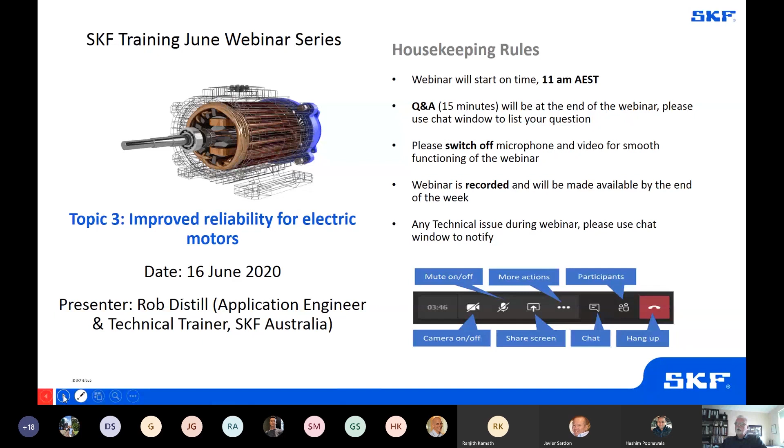I think most of what we'll cover here will be perhaps consideration of different things that happen in the field and also during rebuilding or repairing.

Typically, electric motors you'll find everywhere. In your house, you'll find them. Just about everything that has any type of mechanical movement will be actuated by some sort of an electric motor. It could be in your washing machine, or in the fan in your air conditioner, for example, your power drills, cordless drills.

In industry, though, we also find many motors, much larger than what you find in the home, of course. They'll be in conveyor drives, pumps, crushers, just about anything that rotates. And as such, there would be more electric motors than any other machine type in the world.

So if an electric motor fails or stops, then the machine itself will also stop. And of course, that can cause many issues with downtime, for example.

Perhaps a motor driving a pump, which is similar to what we have in the bottom left-hand corner here. If one of those pumps stops, perhaps it's not too much of a major drama. But there's still costs involved, of course, but as far as production losses go, they might be minimal.

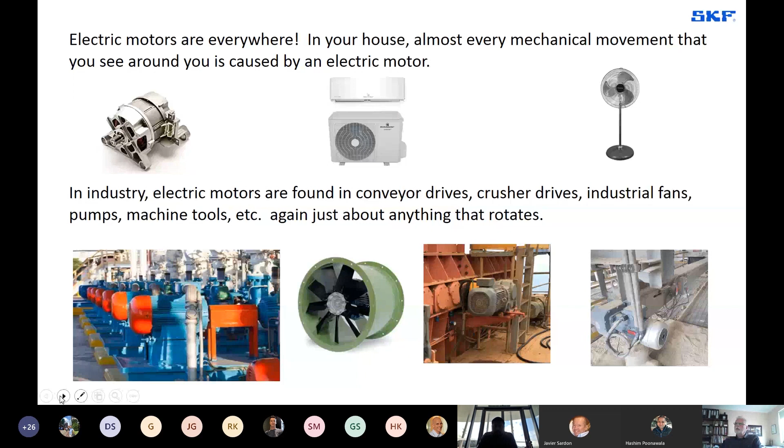Broadly speaking, electric motors can be separated into two different categories. You've got your general purpose motors, which have standard dimensions and characteristics. They're basically, you can find these in a catalogue. Many manufacturers make interchangeable motors. Then we have our special purpose or special design motors, which are for specific applications.

So, for example, it could be traction motors for locos. It could be specific motors that are integrated into electric cars these days, for example. So they're specifically designed for an application, not general purpose.

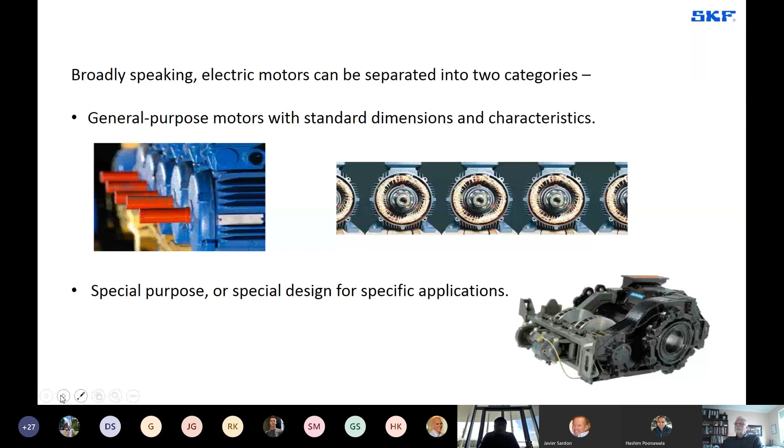So in general, though, medium and large companies, 60 to 65% of those motors are under 10 kilowatts. So they're only fairly small ones. But on average, 43% of electric motors are repaired, and the remaining 57% are replaced by new motors.

Motors lower than 10 kilowatts are usually replaced. These days, though, even much larger motors are just being replaced. They're not being repaired. Anything up to, say, 45, 50 kilowatts are commonly replaced these days. So we're living in a more and more a throwaway society.

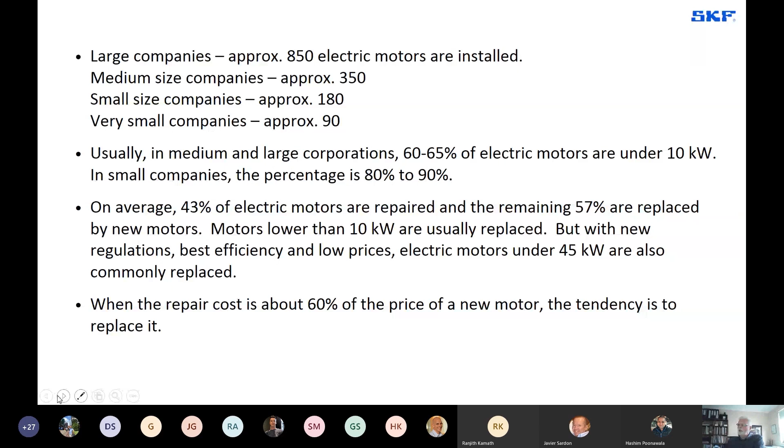When the repair cost is roughly 60% the price of a new motor, the tendency is to replace it.

As Hashim said, 40 to 70% of motor failures are generally related to the bearings, and electric motors account for many stoppages, many reliability incident reports.

General maintenance of a motor, and we're talking about just changing bearings, re-greasing, seals, for example. Not talking about electrical reworking, but it may be around 5 to 10% of the purchase cost of a new motor. So relatively cheap just to replace the bearings.

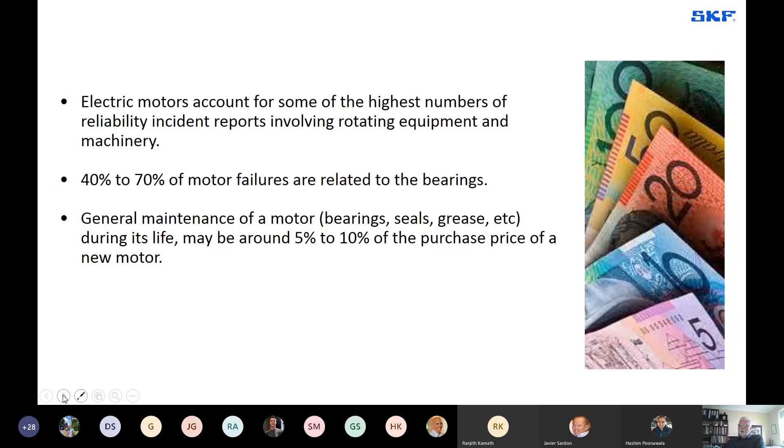However, we still need to have good reliability. So assuming quality bearings are used, how they're installed, how they're handled, lubricated, how the motor's aligned, that has a huge impact on motor reliability.

How the motor's installed, how it's also lubricated. So firstly, we have to lubricate correctly from a repair point of view, or the OEM has to lubricate correctly. But then when it's in the field, it has to be also continually lubricated, in the correct way, using the correct grease. How it's aligned, how it's maintained - these are all critical to the motor's performance and longevity.

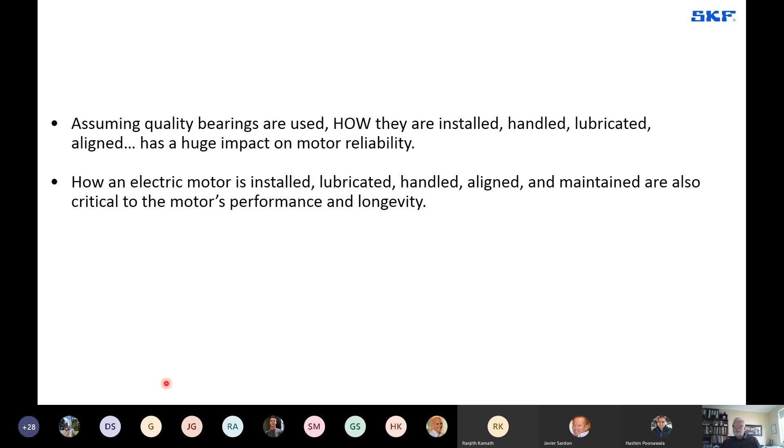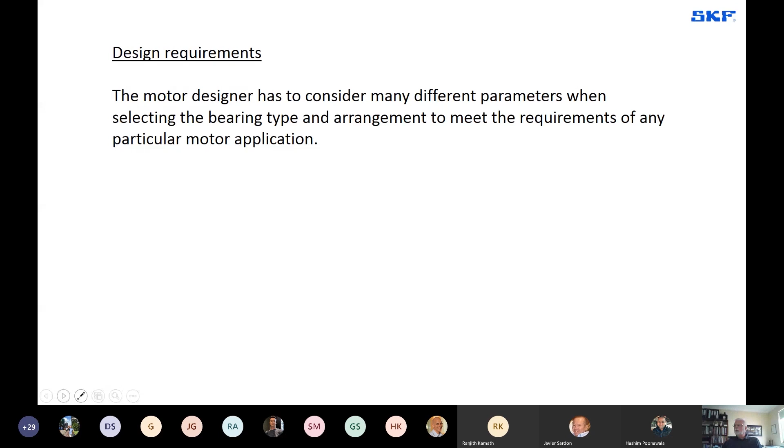Let's look at the design requirements. What does a motor designer have to consider when selecting a bearing type, and what type of arrangement? What does a designer have to consider?

Firstly, dimensions. The dimensions of the bearings are generally determined by the shaft size, and the shaft size is generally determined by the power output of the motor. So that's the starting point.

Now, to determine the shaft size, the designer has to understand what sort of loads are being applied, so all operational loads have to be taken into consideration. If the motor is being directly coupled, for example, the radial loads acting on the shaft and on the bearings won't be as high as if the motor is being fitted with a 6-groove pulley, with belt loads on it.

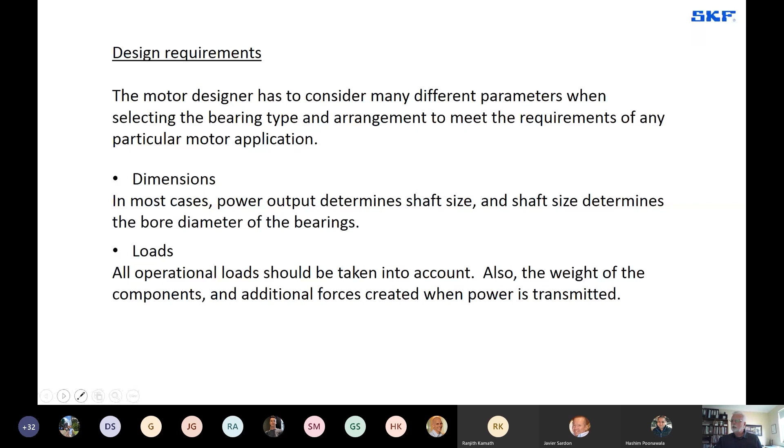So the designer has to take into consideration where that motor is going to be used. He has to understand what these loads are, has to consider the weight of any additional components, the weight of the rotor itself, plus the pulley, plus the coupling, etc. He has to know whether the motor is going to be used vertically, so there's going to be an axial load, for example. Also, there'll be additional forces created when the power is being transmitted.

Speed is important. It influences the bearing and lubrication life. The higher the speed, generally the higher the temperature will be. When the operating temperature is higher, we have to consider different types of lubrication, both in type and quantity, and relubrication intervals based on the operating temperature.

The clearance of the bearing has to be selected correctly. Maybe the seal type, and the cage design of the bearing can be affected by the speed of the motor or bearing. Normally, ball bearings are more suited for high-speed applications than roller bearings.

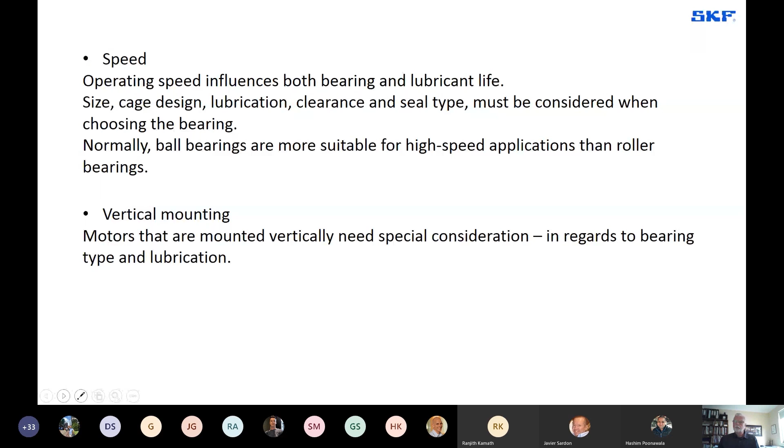Vertical mounting - the bearings are going to be mounted vertically, so perhaps there has to be a specific bearing type which can take those axial loads. Also, lubrication comes into it again - how often it's lubricated, for example, what type of grease is used.

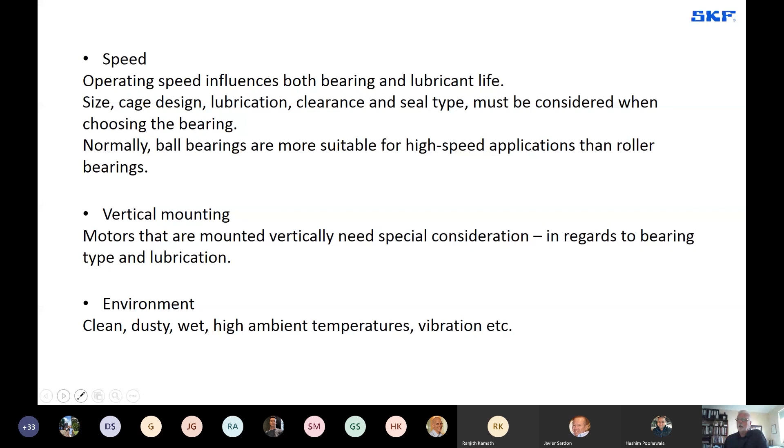Environment - if it's a clean environment, happy days. If it's a dirty environment, a wet environment, a dusty environment, certain seal types are required, and relubrication might have to take place more often to compensate for any contamination that might get into the bearings.

So let's have a look at typical designs. We have to consider a few things in a motor, like shaft expansion due to internal temperatures. If we have a motor operating where the internal temperatures are 80 degrees, for example, and an ambient temperature of 30 degrees outside, there's going to be some thermal expansion of the shaft.

We'll normally have a locating bearing on the left-hand side here. The locating bearing is held and locked onto the shaft - the inner ring's a tight fit on the shaft, and the outer ring sits in the housing and would normally be axially clamped. So the cover is clamped up against the side face of the outer ring of the bearing, which holds it up against the internal cover.

The non-locating bearing has to be able to move axially in both directions to allow for shaft expansion and contraction if shut down. There are different types of arrangements we'll talk about later, but this is showing a deep groove ball bearing at this end, and you'll see there's a wave washer sitting here. This wave washer is allowed to compress - it keeps a small axial preload on the bearing, but as the shaft expands, the wave washer can compress, which allows the bearing to float in the housing.

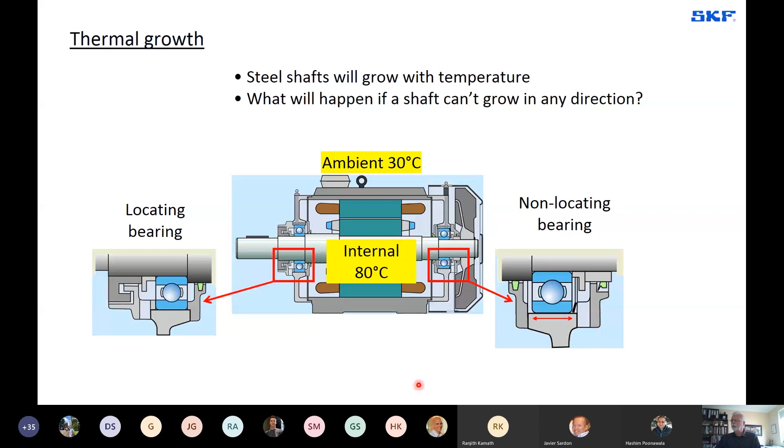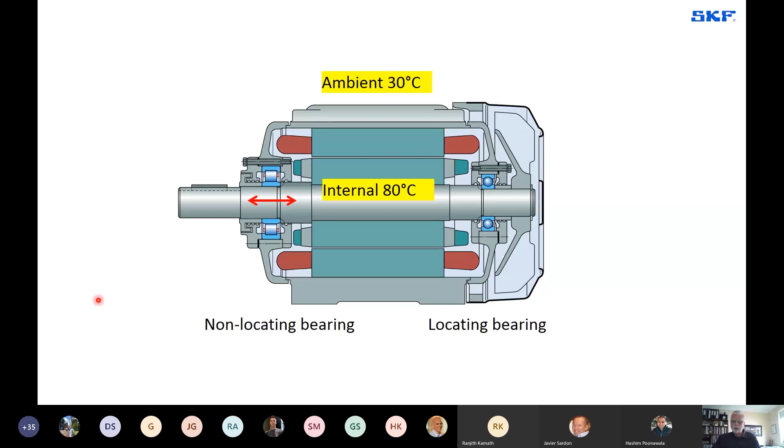Okay, so small motors typically have two deep groove ball bearings. They're typically sealed or shielded with a factory grease fill. They're generally considered to be low maintenance because no relubrication is required. The bearings are designed or selected, and the grease inside the bearing is selected, so that the bearing will give long life under normal electric motor conditions.

So we could be talking 4, 5, 6, 7, 8 years or more. The bearing life is determined essentially by the grease life. Over a period of time, the grease will gradually lose its good lubricating properties, and we'll end up getting a bearing failure at some time. But providing the OEM has selected the bearing and the grease type correctly, and the motor is used the way it's intended to be used, then the bearing should see a very long life.

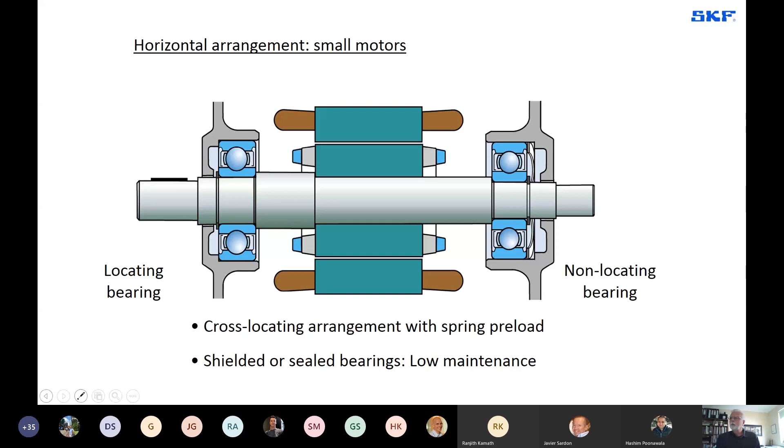Looking now at medium-sized motors. Medium-sized motors typically would still be two open ball bearings. This time they're set up in such a way that they can be relubricated on a regular basis.

In some cases, we have what's called a grease escape valve, which is a rotating disc internally, sits here, and this rotating disc rotates. The grease comes in through to the back of the bearing. The rotating grease disc picks up the excess grease and throws it outwards out the discharge slot.

Technically, these bearings can't be over-greased, providing there's no blockages in the discharge slot. So these bearings, again, depending on the temperatures and speeds, etc., will have to be re-lubricated on a regular interval.

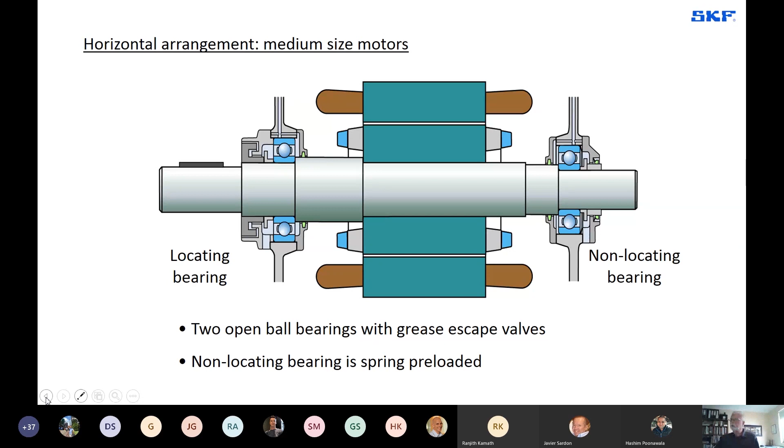Moving now up to large motors. In this case, we generally have heavy loads on the drive side, typically from a V-belt drive, for example. Usually, you'll find the drive side bearing is the non-locating bearing, and it will also be a cylindrical roller bearing.

Again, these motors are usually installed with grease valves, or at least some way to let excess grease come out, because they will be required to be re-lubricated on a regular basis.

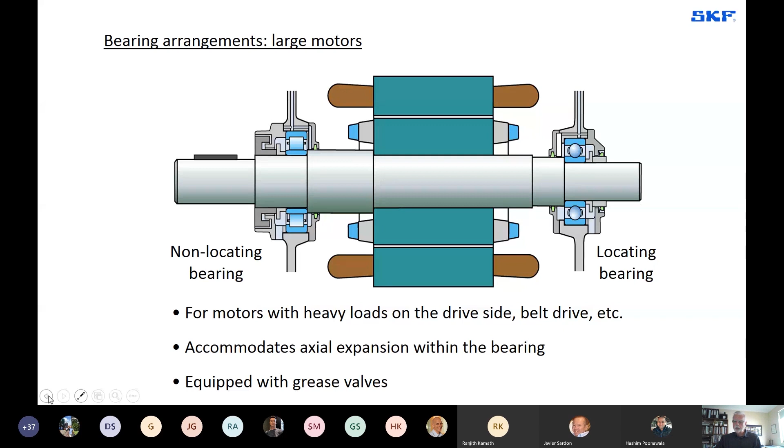We get up to really large motors with very heavy rotors. It might be necessary to have a cylindrical roller bearing at each end. Now, these bearings can't take axial loading, so therefore it's necessary to have a deep groove ball bearing, or perhaps a 4-point angular contact ball bearing, to locate the rotor and take any axial loads.

Again, these bearings, because of their size, need to be re-lubricated on a regular intervals.

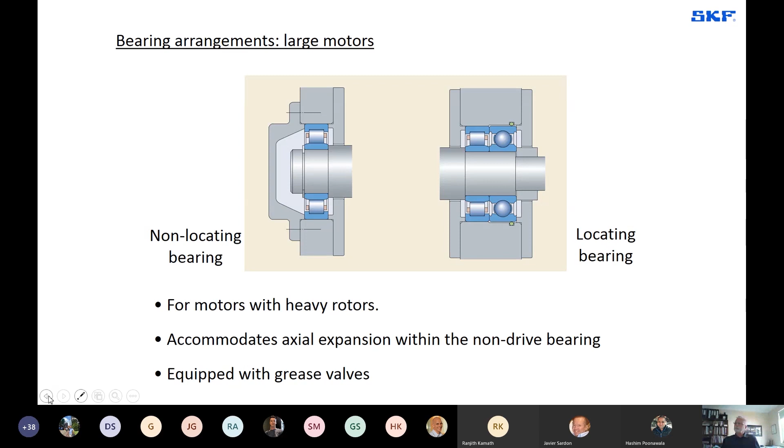Finally, vertical electric motors. Vertical electric motors, especially larger ones, may have angular contact ball bearings, for example, to carry the axial loading. With a vertical shaft arrangement, quite often the radial loads will be minimal unless the motor is connected to a driving something with a V-belt drive.

It's really important with angular contact bearings that they are orientated the correct way. If they're a back-to-back or a face-to-face design, it's important that the bearings during maintenance go back in the same way. They can't be altered. So angular contact bearings, if fitted the wrong way around, will fail very quickly.

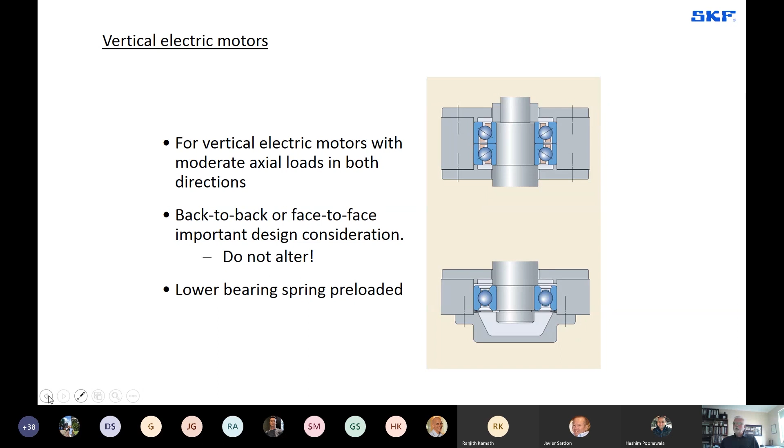Okay, so what is causing bearing failures in electric motors? A study done back in 1990 shows that lubrication was the main issue relating to poor reliability, followed by contamination, alignment, installation, overload, and the environment.

And sometimes it can be a combination. Quite often it's perhaps a combination of all these things which cause bearing failures.

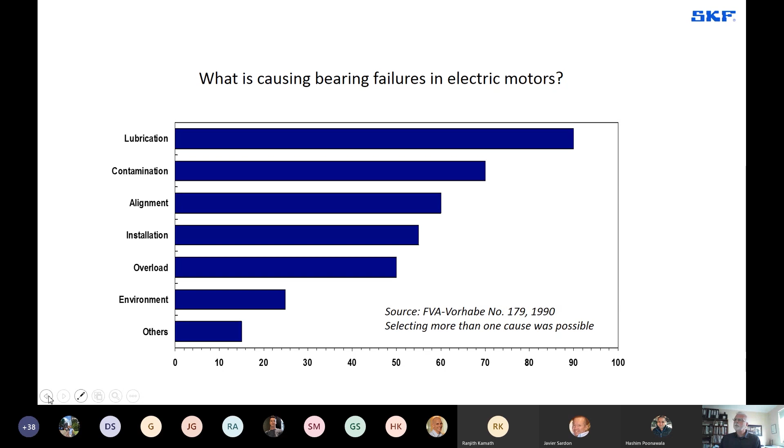So if we look at it from what I'd call an in-operation factor, we've got operational factors such as perhaps overloading, basic care, lubrication, unbalance, for example, can all cause issues.

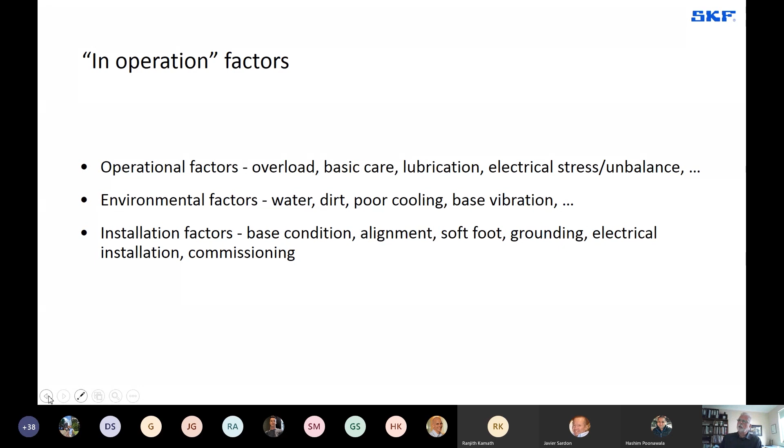Environmental factors such as water, dirt, poor cooling, vibration. Installation factors where we're looking at poor base condition, poor alignment, soft foot, grounding, electrical installation, commissioning. All of these things are classed as in-operation factors.

So let's look at lubrication to start off with. How much grease do we put in? I'm not going to talk about oil lubrication here. I think the majority of motors are lubricated by grease. So if we just consider grease at this stage, how much grease do we use? How often should it be put in? What type of grease?

Obviously, something like this is indicating insufficient grease. We've got a massive cage failure. We've got a bearing which has failed catastrophically. When we look over here, we can see too much grease. Grease has gotten in, it's filled up the back of the motor, completely filled the windings up.

So how much to start off with? Typically, electric motor manufacturers will generally specify how much grease, what type of grease and how often. If that information's not available, the SKF rolling bearings catalogue, pages 110 to 127, has a really good chapter there on lubrication.

It talks about selecting the correct viscosity, the correct consistencies, how to determine how much and how often. How much is determined by the size of the bearing, how often is determined by speeds, temperatures, environmental conditions, etc. The other thing that can be used is a program that SKF have put together called DialSet.

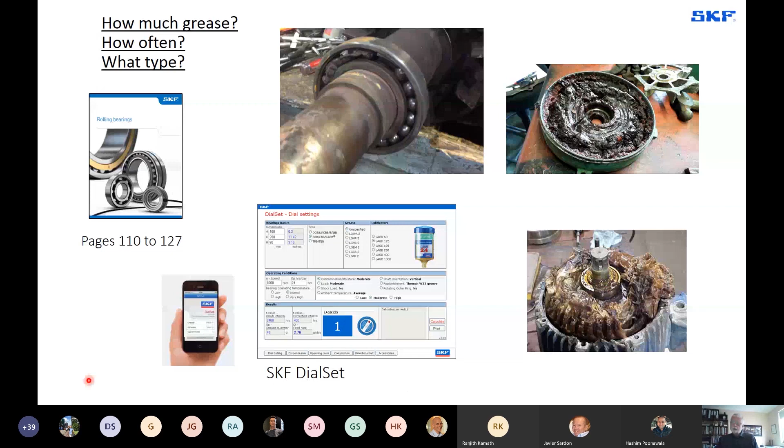The other thing we need to consider, whether you're manually lubricating or using automatic lubricators, is the cage type. For example, a pressed steel cage in a cylindrical roller bearing requires lubricating more often than a polyamide cage will.

Temperature, shaft orientation - think about whether excess grease can exit the seals. If the excess grease can't get out, it's eventually going to fill up the inside of the motor. Quite often you'll find the grease ducts that exit from the bearing are blocked off for transport purposes.

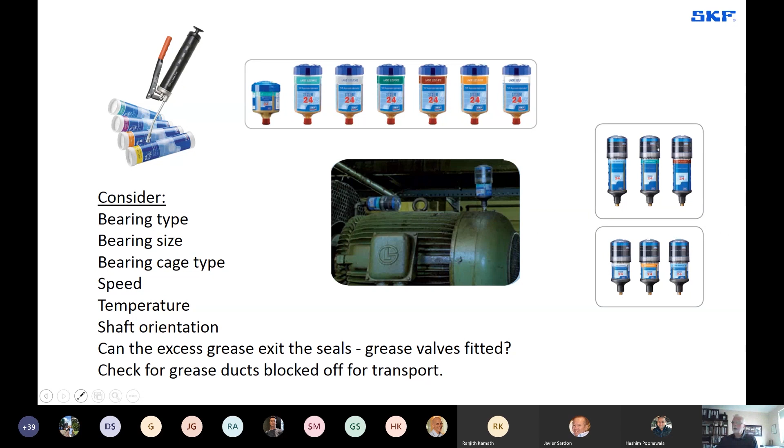As I said, the motor manufacturer selects the bearings based on the typical loads. What if you've got excessive belt loads? Perhaps the drive's been over-designed. Maybe somebody's decided we need to put 8 C-section belts on, for example, instead of 5 B-section belts.

Straight away, we've got so much more load on the bearing, which is going to cause a couple of issues. One will be reduced bearing life because of the load. The other will be perhaps higher bearing temperatures, which then require adjustments to relubrication.

Perhaps we've got a motor with ball bearings in it, both on the drive and non-drive side. Perhaps it's designed for a direct drive and somebody's decided to remove the coupling and fit a pulley and belt drive instead. The ball bearing now is going to be overloaded or excessively loaded compared to what was intended.

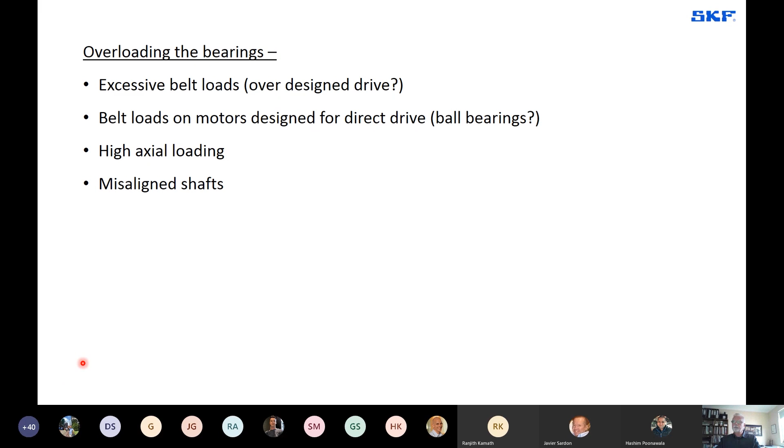What about underloading the bearings? Something that's quite often not considered - if we have a vertical shaft, perhaps there's no radial load on the bearing now.

What about test running after a motor's been put together? In some cases, the mass of the rotor mightn't be enough to put sufficient loading on the bearings. If you've got a motor connected with a rigid coupling that's aligned very accurately, in some cases that rigid coupling can carry the load of the rotor, and the bearings in whatever the motor's connected to can actually be supporting part of the mass of the rotor, which then unloads the bearing.

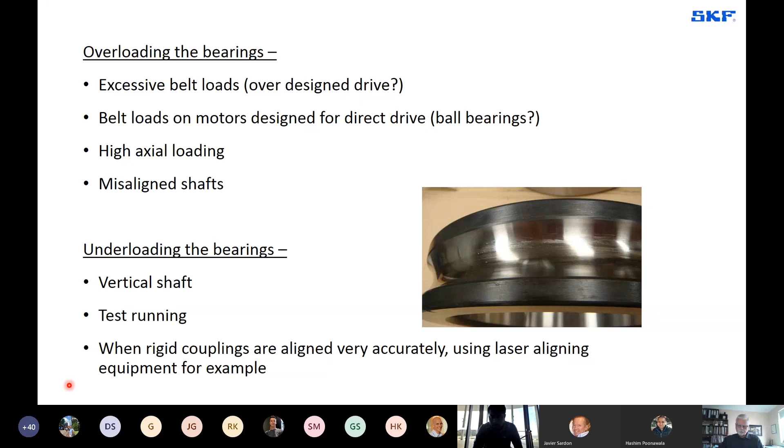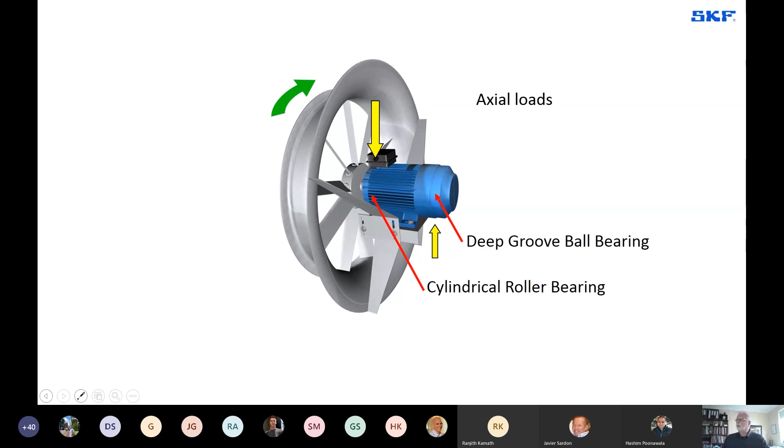Looking at the radial loads, we've got a reasonably high radial load acting downwards at the front, and a smaller vertical upwards load acting on the deep groove ball bearing at the rear of the motor. Now look at our axial loads - the ball bearing at this end is not only taking a radial load, it's also stopping the rotor and fan from moving in this direction, so it's carrying the axial load.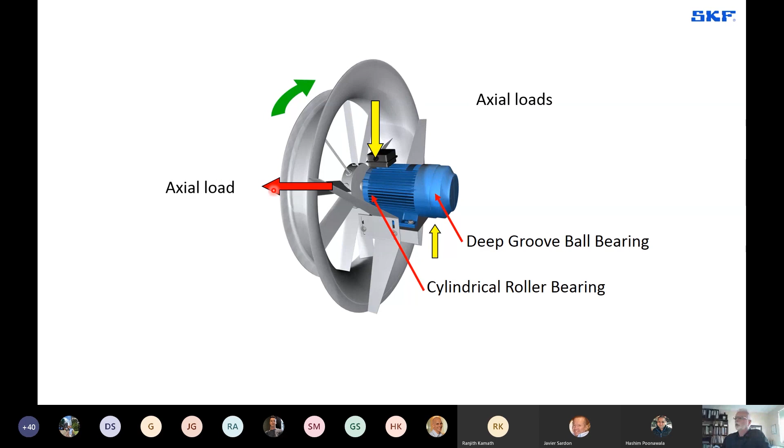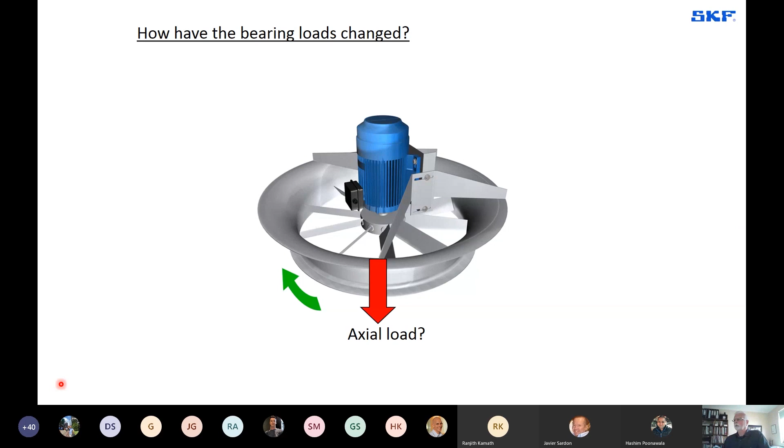What happens now? How have the bearing loads changed? Firstly, the axial load has increased considerably because now the bearing at the non-drive side has to carry the axial load from the rotor and the mass of the fan. Perhaps that axial load's now too heavy, and perhaps that deep groove ball bearing needs to be replaced with an angular contact ball bearing, for example.

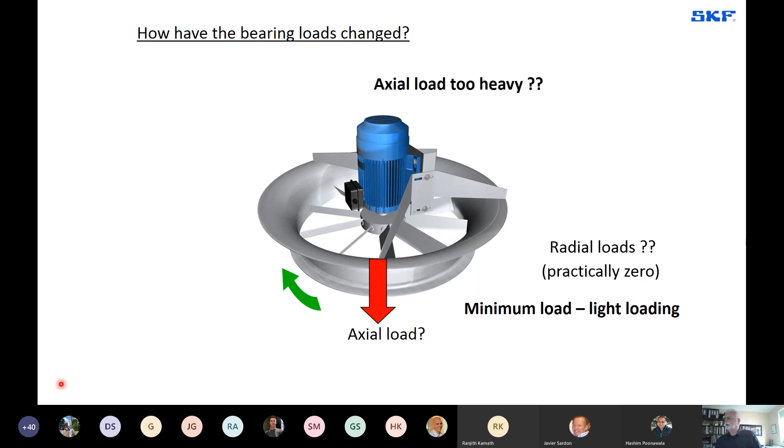How about radial loads? What's happened to radial loads? They've gone to practically zero. So now we've got the situation with a cylindrical roller bearing which might be too lightly loaded. If it's too lightly loaded, the rollers won't rotate well and could end up causing skidding damage. So that's one thing to consider.

Misaligned shafts will always cause strain and stresses in the shafts, bearings, couplings, in the driven machine and the driving machine. So it's very important to ensure that you've got good alignment.

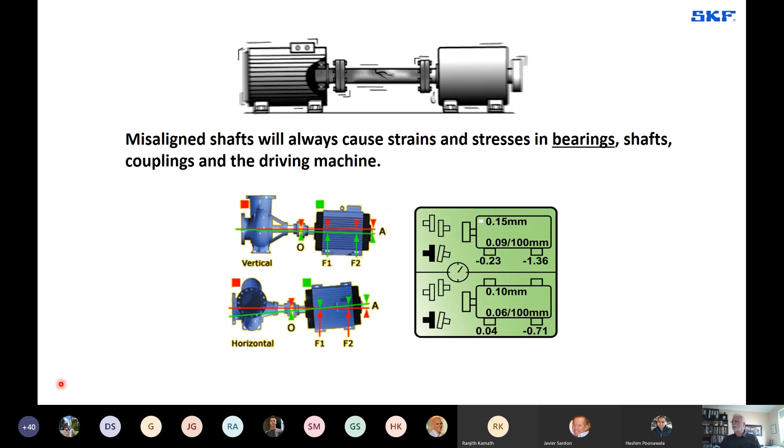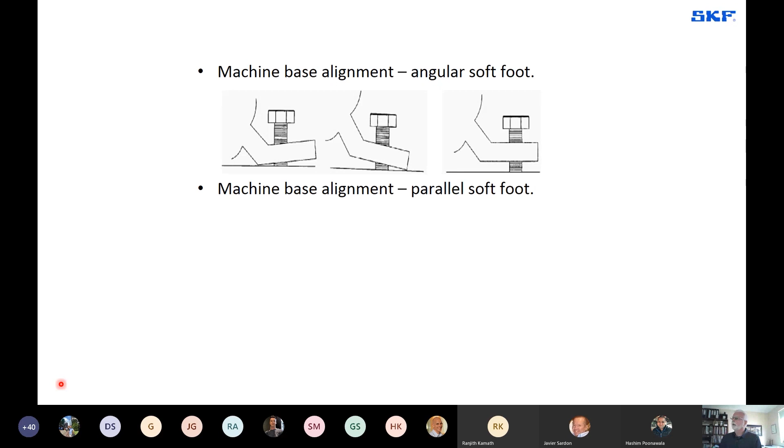Machine base alignment. What if you've got soft foot? Perhaps you could have angular soft foot, where the base of the machine is on an angle to the mounting surface. Perhaps you've got parallel soft foot, where you've got a gap between one of the feet, for example.

What happens if you tighten that up or ignore it? What issues do you have? You could have a weak, damaged or flexible type sole plate or base plate. You could definitely get shaft alignment issues, but also there's a possibility of distorting the bore of the end cover of the motor, for example. If the housing bore distorts, there's a good chance the outer ring of the bearing will also be distorted.

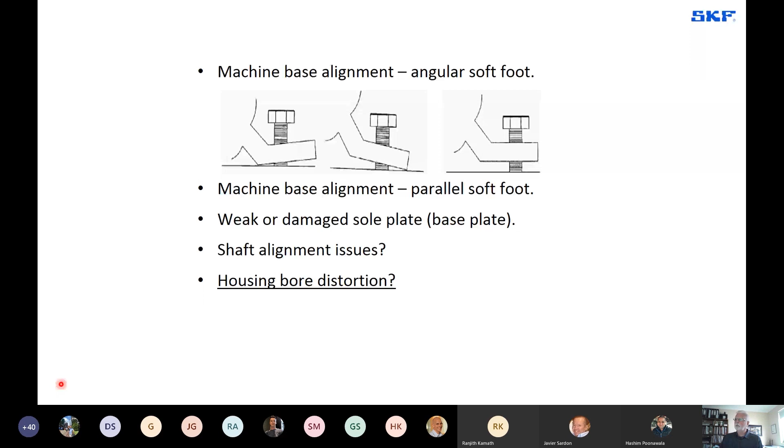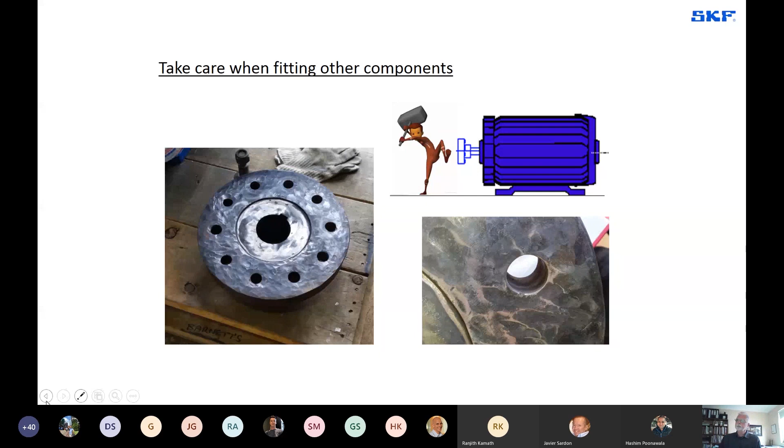Current leakage. This is becoming more and more prevalent, especially where you've got machines operating with variable speed drives. This is where you get electric current passing through the bearings, from the inner ring through the rolling elements and arcing through the lubricating film, causing damage to the raceways and causing the grease to become hard, drying the lubricant out.

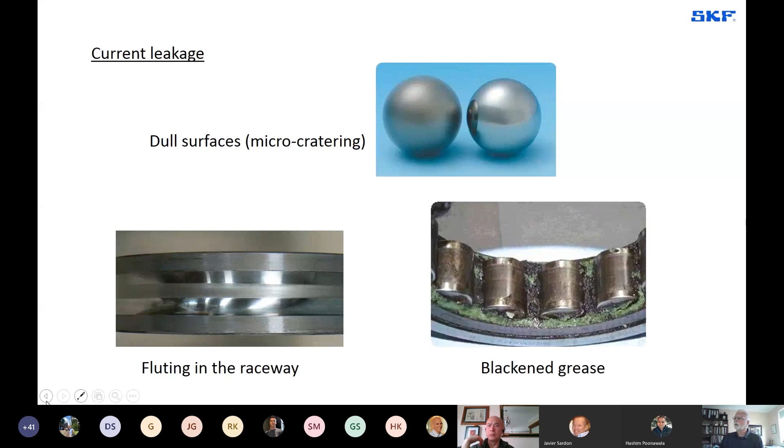It's a fairly large problem, but there are solutions for it. Some of these solutions can be fitting insulated bearings in. SKF do a range of bearings. The larger ones are what's called INSOCOAT, an insulating aluminium oxide layer that's plasma coated to the outer surface of the bearing in most cases. In some cases, it can be on the bore of the bearing as well. This doesn't change the dimensions of the bearing, and the bearings can still be fitted in the normal way that any other bearing could be. So that coating helps prevent the current flow through the bearing.

With the smaller bearings, we quite often use what's called hybrid bearings. Hybrid bearings have your normal steel rings, but the rolling elements are made of bearing grade silicon nitride. Again, that creates an insulation which blocks the path of the current flowing through the bearing.

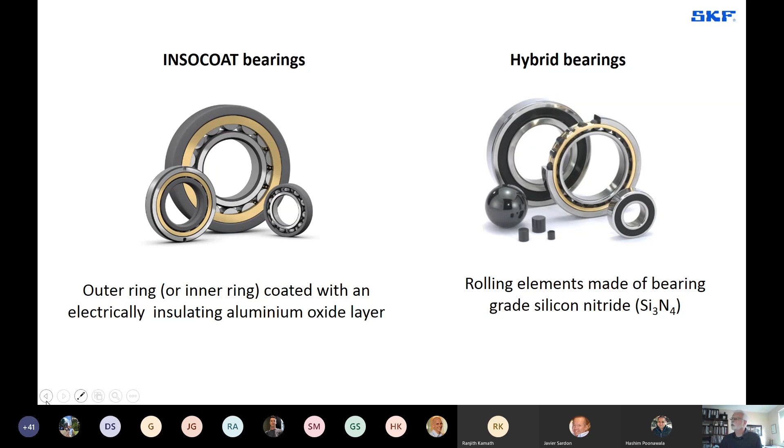Dirty environments. There's a possibility of getting dirt into the bearing, and certainly a change to the cooling effectiveness. If we get the cooling fan slots or the grooves through here full of contamination, we're now not having good cooling effectiveness, which means the bearings will then be operating at elevated temperatures. Changes in temperature means the grease might break down, for example.

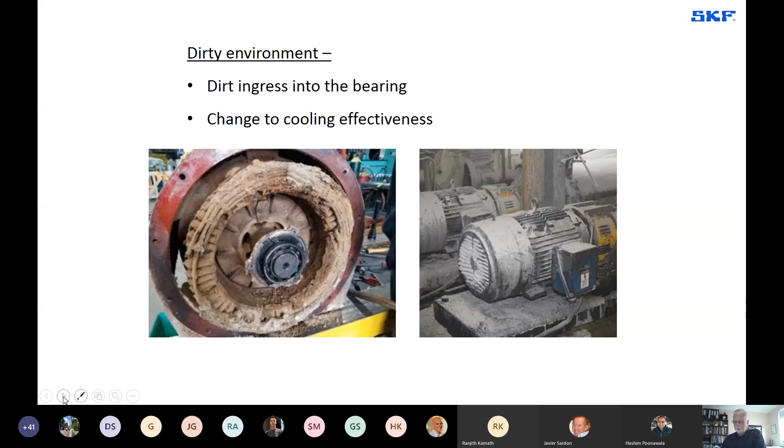Vibration from other machines during non-operation. So we've got a bank of machines here. One of these could well be a standby machine. It's sitting there stationary. We've got vibration from around here causing the rolling elements in the bearing to be vibrating backwards and forwards, which then causes depressions in the raceways. It's what we call false brinelling.

So to get around that, we should be rotating machines on a regular basis. Just don't let it sit there for 6 months, 12 months, not operating, because if you do need to use it because it's a standby machine, the bearings will normally fail very quickly. They'll be quite noisy. So it's better to rotate the machines on a regular basis, or perhaps there's a way of strapping the shaft or clamping the shaft so that the vibration around doesn't cause the movements to take place within the bearing itself.

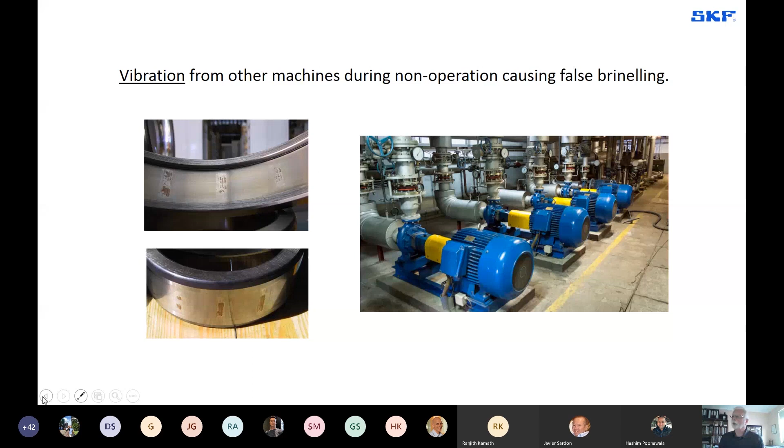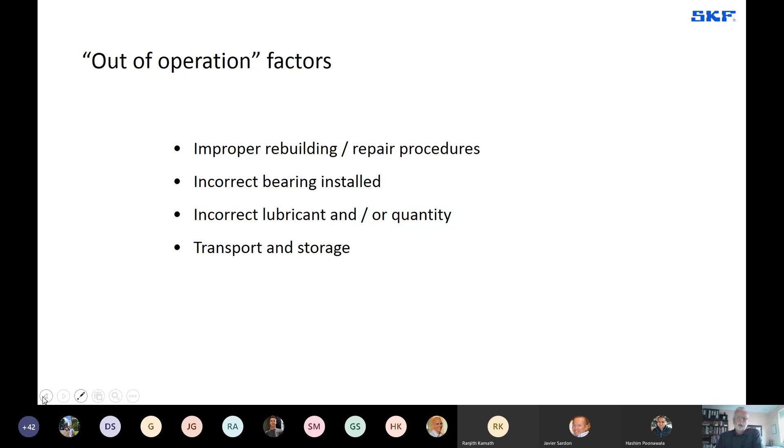Now, that's probably covered most of what I'd call the in-operation factors. There could be some others, of course. We need to now look at what I'd call out-of-operation factors. This deals with improper rebuilding and repair procedures, perhaps the incorrect bearings installed or the incorrect lubricant, and we've also got to consider transport and storage of the motor.

Bearings are made with extreme precision. If the shaft is out of shape or the housing bore is out of shape, and we fit a precision bearing in there, what's going to change shape? It won't be the shaft and it won't be the bore of the housing. It will more than likely be the inner or outer ring, which will change shape to suit the housing or shaft. So we have to make sure the form is correct, and also that the fits are correct.

The bearing inner ring should be the correct fit on the shaft to prevent fretting corrosion and creep, and the outer ring should also be a correct fit.

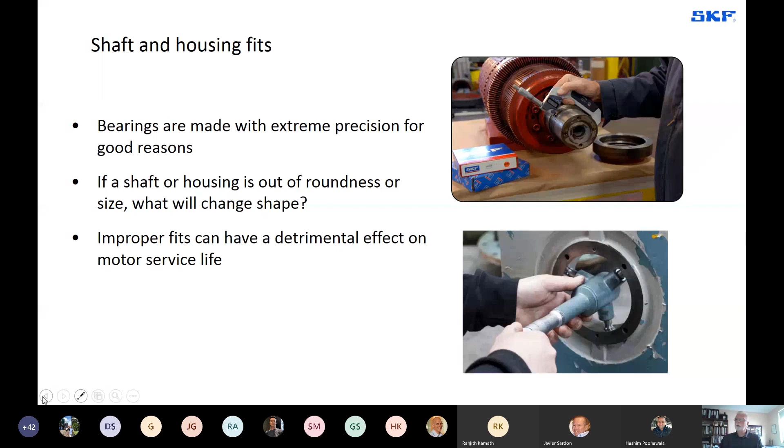An excessively loose fit allows relative movement between the inner ring and the shaft. For example, we could get fretting corrosion. If the fit's not quite tight enough, we could get creep, meaning the inner ring rotates relative to the shaft. That creates wear, which creates more creep, which creates more wear. Small particles wear from the shaft and the inner ring, getting into the grease and causing wear internally within the bearing. It could lead to heat, smearing, scoring, seizure, ring fracture, etc.

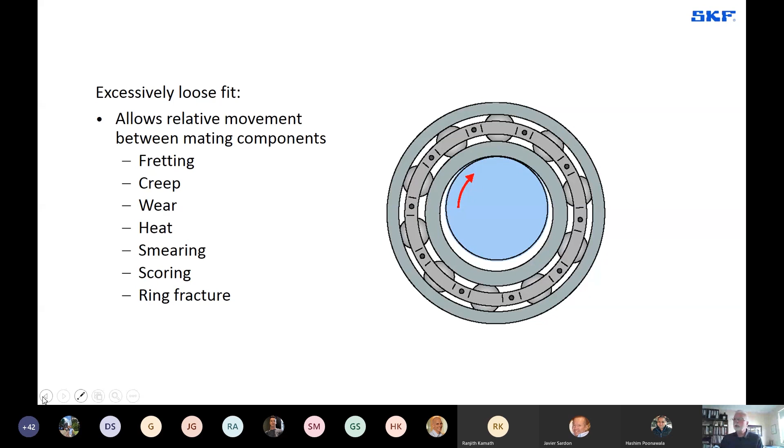If we've got an excessively tight fit, this reduces the radial internal clearance in the bearing. If the inner ring's too tight on the shaft or the outer ring's too tight in the housing, we lose the internal clearance, which increases operating temperature. That could have an effect on lubrication. We also get increased mounting forces, and potentially, if it's too tight, the inner ring could fracture.

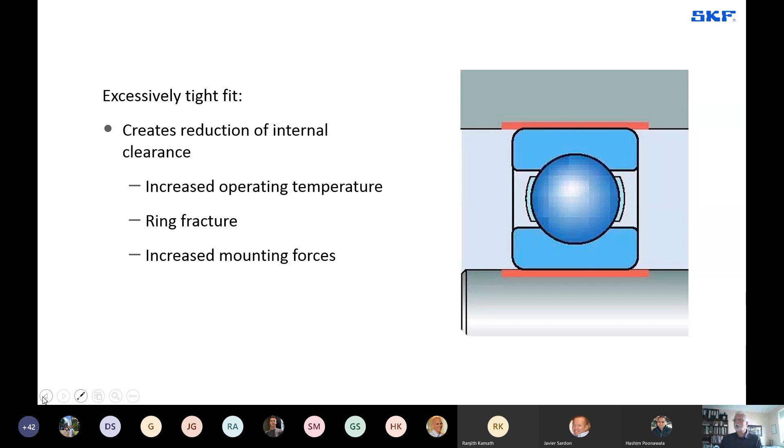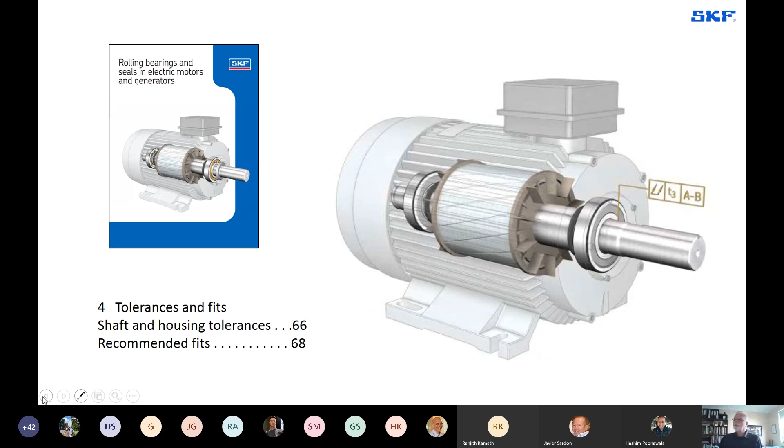When doing a rebuild or changing bearings, it's important to measure the shaft and the housing bore, record all those dimensions, make sure the shaft is round, make sure the housing bores are round, and make sure the fits are correct.

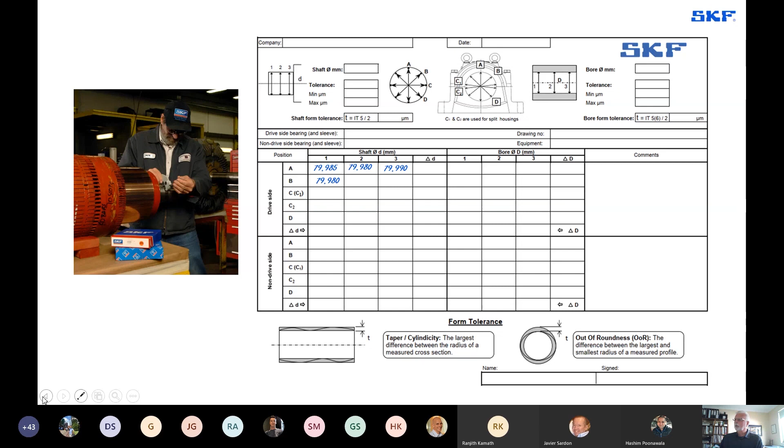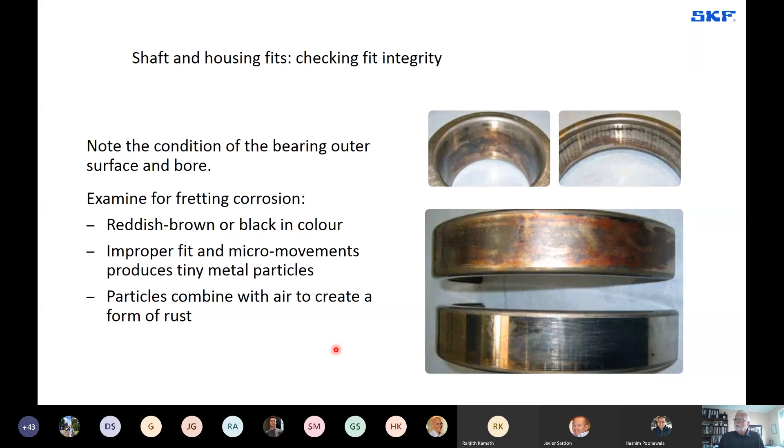On the outer ring, it's quite common to see fretting corrosion, usually in small amounts. If we've got large amounts, it's an indication that the bore could be out of shape, but also an indication there could be a very severe vibration problem. Fretting corrosion is caused by vibration. If the fit isn't tight enough, the ring will move slightly due to vibration, so if you eliminate the vibration, you'll usually eliminate the fretting corrosion. But if it's as severe as shown here, I'd be looking at reasons why this machine is vibrating so much to cause this severe fretting corrosion.

Here we see it in the bore of the bearing as well, so we've got a twofold problem: an issue where the bearing isn't tight enough on the shaft, and potentially an out of shape housing here, or severe external vibration.

Just remember, if you're doing a repair job, don't go attacking this fretting corrosion with emery paper or flap discs. Try to just remove the high points, the rusty components, with something like Scotch-Brite pads. Don't remove material, because if you do, you'll make the bearing bore slightly larger, which increases the fit, so to speak.

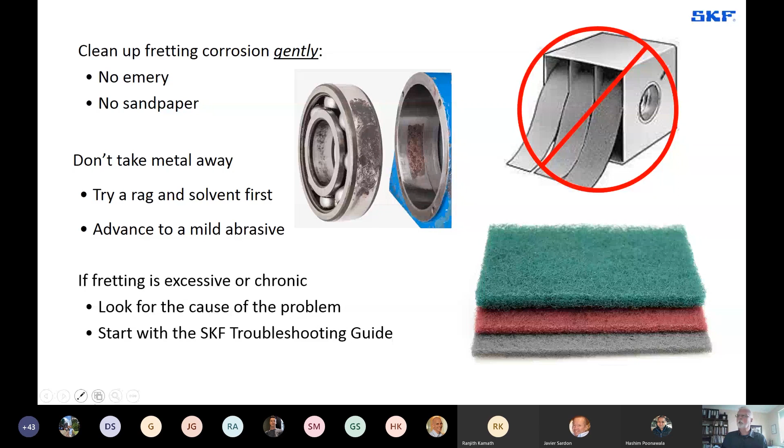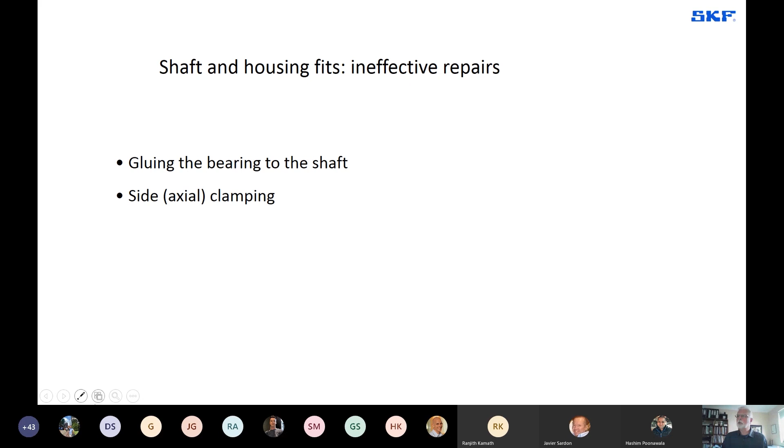Ineffective repairs: gluing the bearing to the shaft is not an effective way to repair it. Side or axial clamping, for example with a lock nut, will not clamp the inner ring correctly on the bearing. The bearing must be a correct tight fit on the shaft to prevent movement from occurring. Certainly, knurling or peening is not an acceptable way of repairing a shaft.

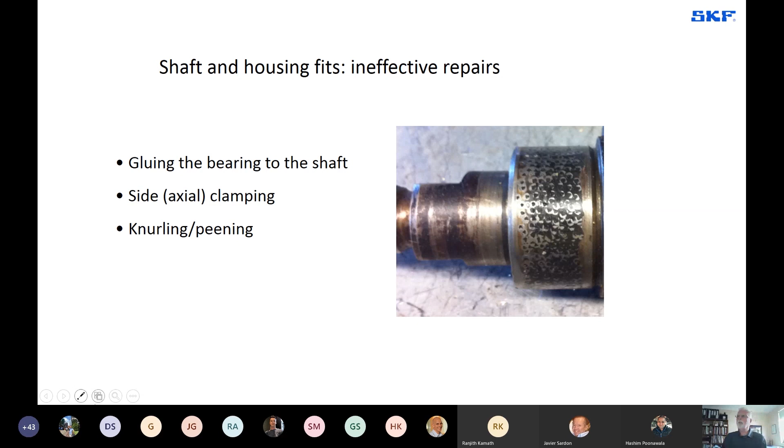Mounting bearings correctly has to be done correctly. You've got to be using the right tools. Small bearings up to 100 millimeters OD can be fitted cold. The important thing to remember is if the bearing is an interference fit on the shaft, the fitting tool must apply the force to the inner ring. Likewise, on the outer ring of the bearing, if the bearing is tight fit in the housing, we must apply the fitting force to the outer ring. If you don't do that, the rolling elements, being harder than the raceways, will put indentations in the bearing, and you'll have a noisy bearing on startup.

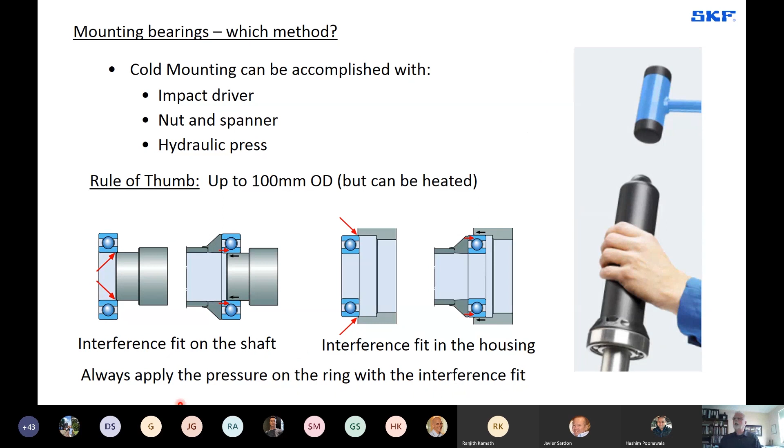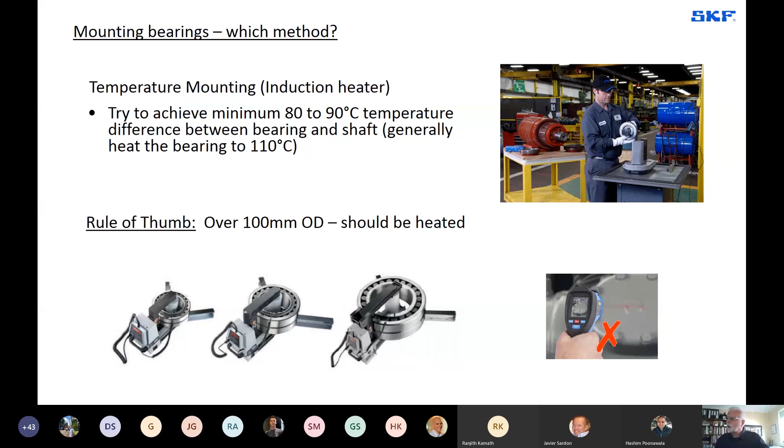Preferably, bearings should be heated on an induction heater, for example. Try to achieve a minimum 80 to 90 degree temperature difference between the bearing and the shaft. That's usually hot enough to fit the bearing on the shaft without any issues. A word of warning: try not to use an infrared temperature gun for determining the bearing temperature. There's too much issue with emissivity, and you won't record the bearing temperature correctly. It's important that the temperature probe is attached to the inner ring of the bearing.

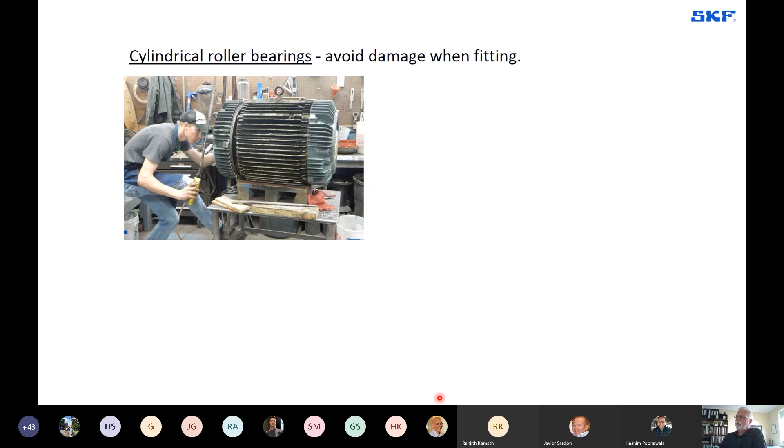Cylindrical roller bearings - just to avoid damage when fitting - one of the issues is that the rolling elements at the 12 o'clock position drop downwards. If you've got the outer ring or inner ring of the bearing on the shaft, the outer ring of the bearing is in the end cover. As you're trying to fit the end cover on, the rollers can drop down, and if not done correctly, they'll cause damage to the inner ring of the bearing.

For that reason, the suggestion is, firstly, we should be packing the rollers with grease, applying a film of lubricant to the surface of the inner ring. Certainly try to rotate this whilst you're installing it, but more importantly, make up a dummy sleeve which sits on the shaft as a loose fit, and that pushes the rollers up into position whilst you're pushing the end cover on. That will help prevent any damage to the bearings.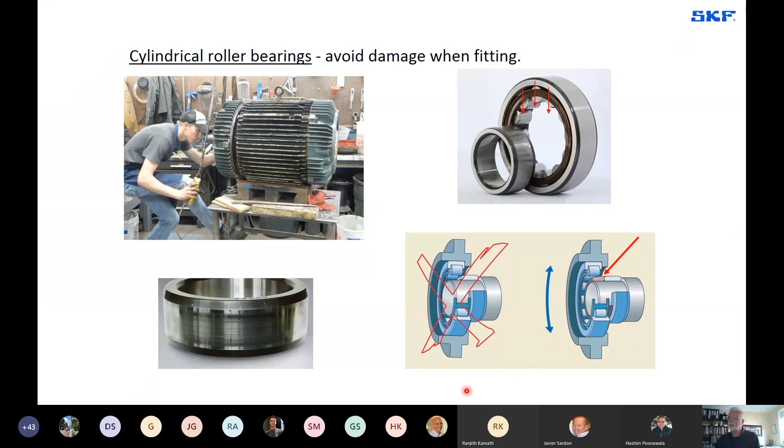Radial internal clearance - you've got to make sure that the bearing being fitted has the correct clearance. Most common for electric motors is C3 clearance. In some cases with small motors, they could be less than normal clearance, so that they operate quietly. However, if a motor is designed to have C3 clearance bearings and you fit a normal clearance bearing instead, there's a good chance that the clearance will be removed during operation, and you'll end up having a bearing which is running quite hot.

Also, factory fill grease - there's many different grease types to suit sealed or shielded bearings. If a bearing is being operated in a motor subject to very high ambient temperatures, it's not advisable to use a bearing which has normal temperature grease in it. There could be a special high temperature grease that's required for that application.

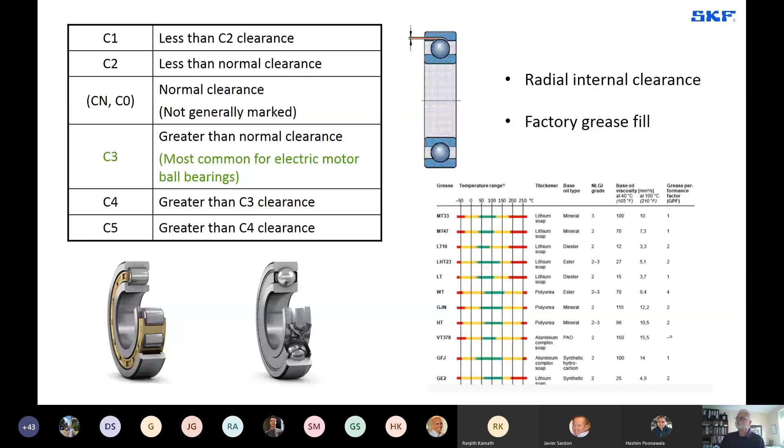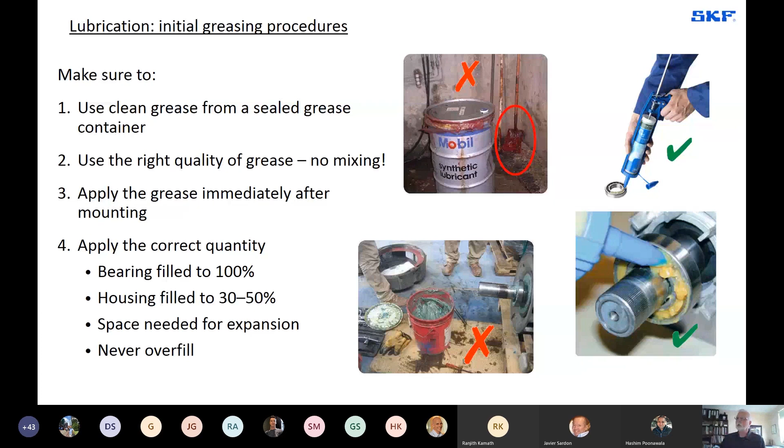When you're packing grease into greasable bearings, ensure that you've got good, clean grease. Make sure you're not mixing grease, changing consistencies, or changing grease or oil types. The correct amount of grease is generally: pack the bearing 100% fill, and the housing is filled 30 to 50% to allow for expansion and excess grease. Don't overfill it. Make sure you're using good, clean applicators to fit the grease.

Looking at testing a motor, in some cases the rotor weight will not necessarily give enough load. If you test run a motor without load, there's a possibility of damage to the bearing due to skidding. So in some cases, it might be necessary to make up an attachment or a jig to apply an external radial load.

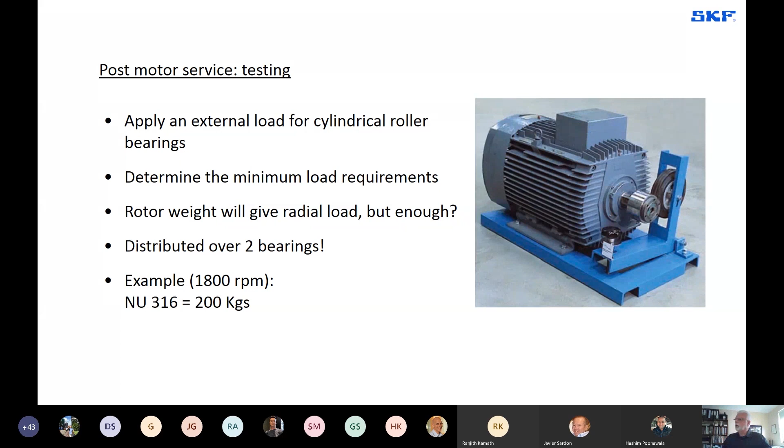And finally, transportation and storage. It's a good idea to strap the shaft somehow, whether using a strap or a metal strap, to apply an axial or radial preload to stop any vibration. It's preloading the bearing to stop any vibration from causing false Brinelling. Make sure the motors are stored in a clean, dry and vibration-free environment, and it's good practice to turn shafts every 3 months to ensure that the grease gets distributed around the rolling elements.

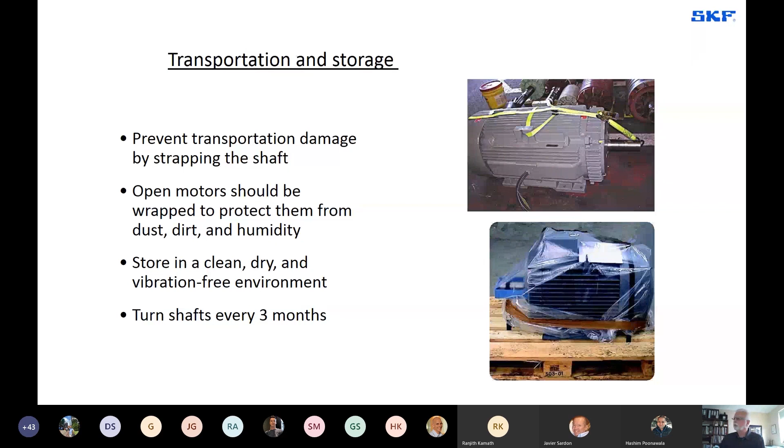So finally, anything you need to know about bearings and electric motors, there's really good references in the rolling bearings and seals, and electric motors and generators publication, as well as the rolling bearings catalogue and online.